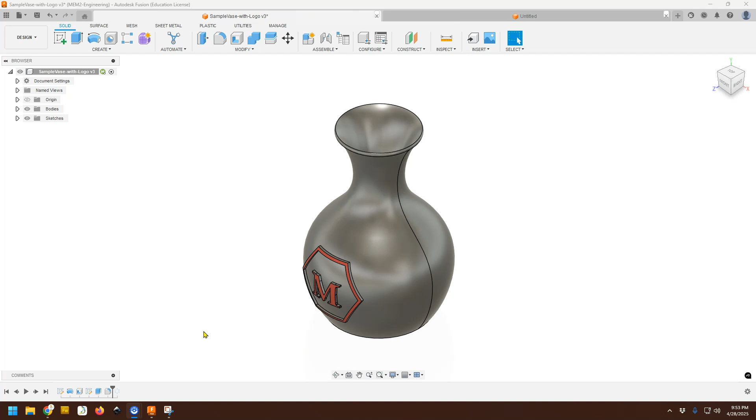In this video, we're going to walk you through how to make a simple vase like this one. If you look at this vase, it is curved on the sides, it has a logo on the front, and it is hollowed out on the inside.

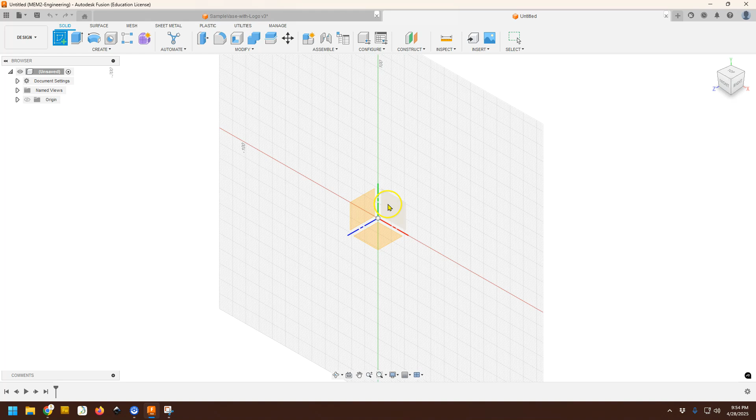So first, let's start a new object. I'm going to start with a sketch, and I'm going to pick one of these vertical planes to sketch on. Now I'm going to start by just drawing a couple lines that represent the overall size of my vase.

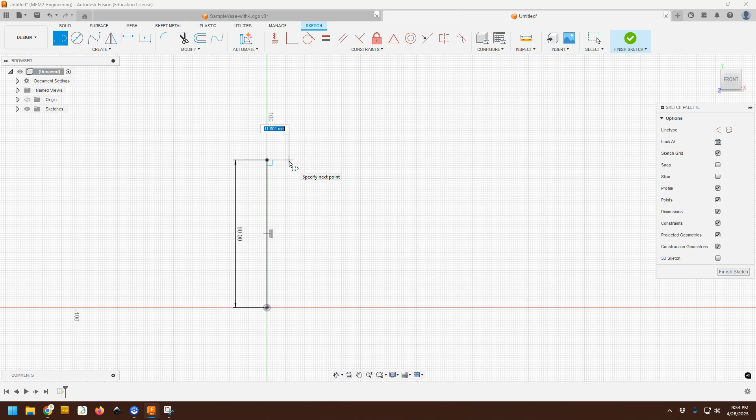Now I want my vase to be 80 millimeters tall. It's a little vase. I want the neck or the top of the vase to be 36 millimeters wide total, so I want to type in half of that. And then I want the bottom to be a little bit wider, and that's going to be at 20 millimeters.

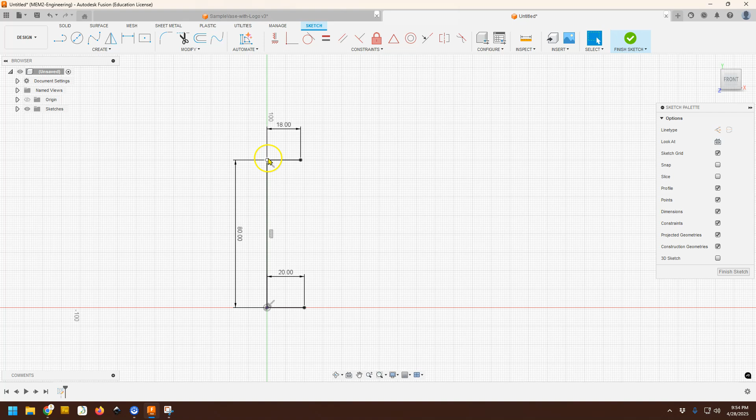If you notice, as I'm drawing these, I'm allowing Fusion to add constraints, to add these horizontal constraints and this vertical constraint as I draw it and let it snap to vertical. Now these three lines are sketched as a guide to give me the overall size of my vase.

Now I'm going to sketch the curve of it, and this I'm going to do freehand. So instead of a line tool, we're going to go up here and use the fit point spline tool. If it doesn't show up on your toolbar, you can go to create, then spline, and it should be the first one.

And now I'm going to click. I'm going to start from the top and go down to the bottom and just kind of draw a few dots that define the curve of the vase that I want. So I'm going to start by clicking on the top corner here.

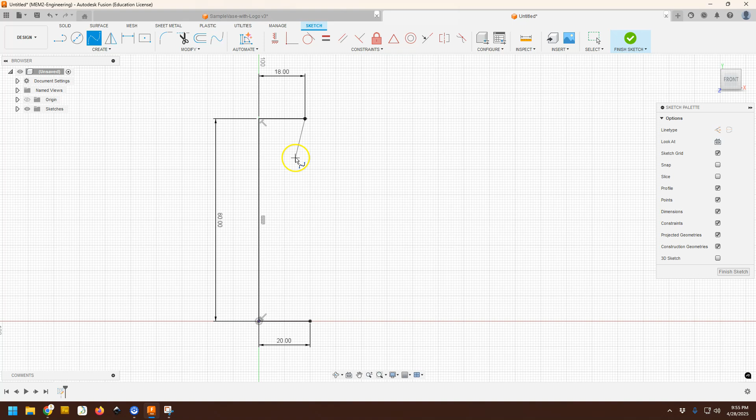I want to come in a little bit, then come back out a little bit, then come back out farther, and then curve down. And this last one, I'm going to let snap to the bottom line here. And then I'm going to finish.

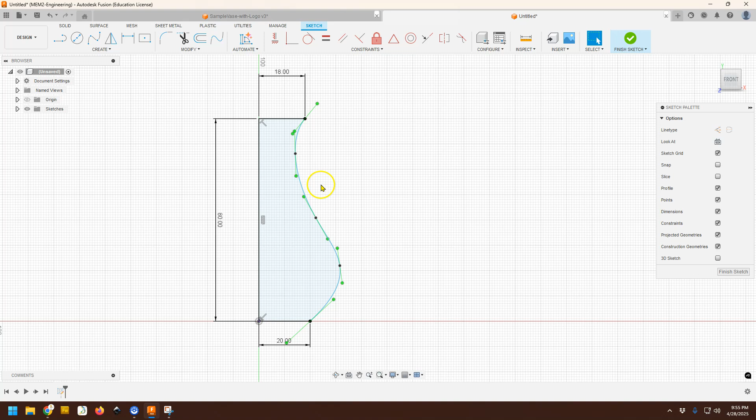And now I have an enclosed shape, and again, I just kind of freehanded that. Now, if you want to change any of these, you can hit escape or hit the select button to go back to select. And if you notice, when this spline is selected, if you zoom in a little bit, each dot where I click, there is a kind of pivot point there, and I can move this around.

So I can kind of redefine it. If I want to go a little bit thinner up on top, I can move it in. If I want to be a little fatter up on top, I can move it out.

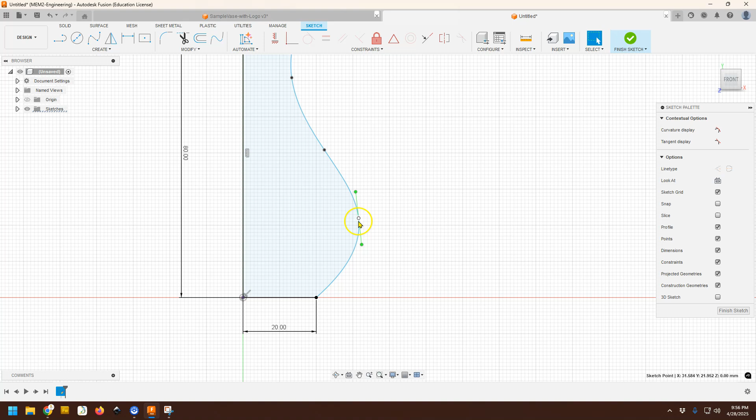And also, when I select one of these dots, I can actually control, there are these handles that show up, these green handles, and this lets me control how curvy that point is. So you can kind of go back and by hand redefine the shape of your vase. And again, at this point, it's good to just play around with this to get a feel for how to draw splines and what these handles do and what moving the points does. For our purposes here, this is a fine shape for me.

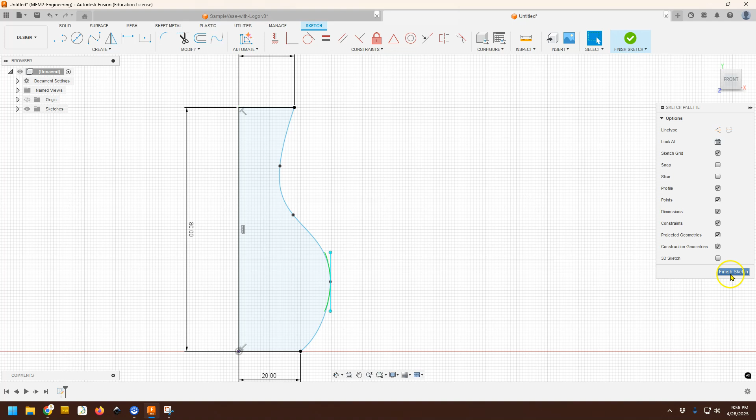So I'm going to finish my sketch and go back to our home view. Now, this time, instead of extruding things in one dimension or extruding things linearly, we're going to revolve something.

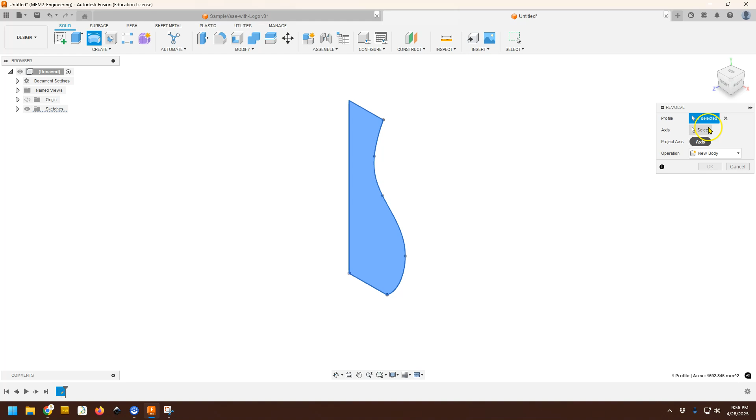So I'm going to go up here and click the revolve tool. It automatically selected my vase. If it didn't select it, I could just select that sketch. And now where it says axis over here, this is the axis you want to revolve around. I'm going to choose this edge here of my vase, and it spins it around.

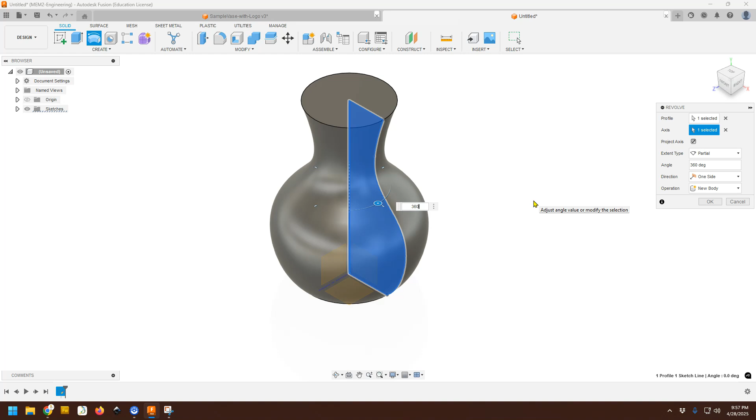And right now it says 360 degrees, but you could do a partial revolve, like if you want to make a Pac-Man vase, which wouldn't be a very good vase. But we want to fully go around, so we're going to make sure that is 360 degrees, and we're going to hit OK. And there is the outline of our vase.

Now that doesn't make a very good vase if it's just an outline. We want our vase to be hollowed out on the inside. So we could draw another shape and revolve it around and subtract it, but there's another tool that works really well for this.

We're going to go up to the Modify menu, and we're going to select shell. If it doesn't show up, go to modify and select shell. What this does is let you select a face and then tell it how thick you want your thing to be, and it'll actually hollow out the thing for you.

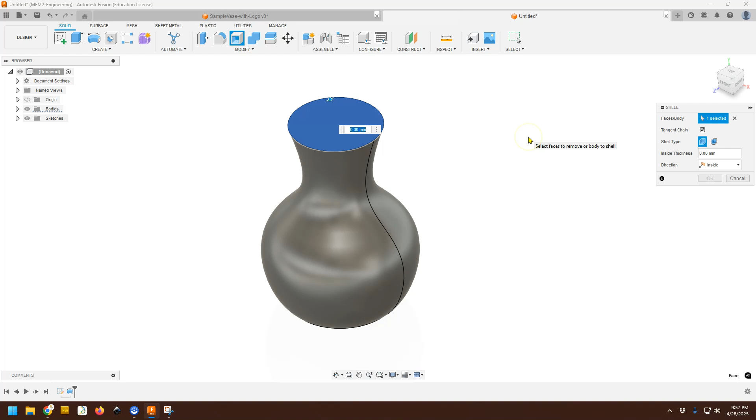So we want to hollow out the inside of this, so I'm going to click the top face. It's going to ask me how big do I want this to be. I'm going to type in 2 millimeters and hit enter. And just like that, I have a hollowed out vase.

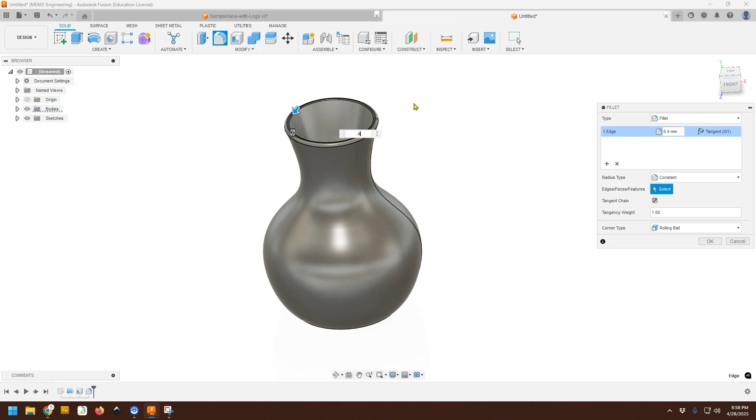Now we want to make this a little bit cleaner looking. I'm going to add a little bit of a round to the top. I'm going to select our fillet tool, click on there, just do a small round to the top. Maybe one on the inside as well. Probably can't do one, it's 0.4, see what that does. Sure, why not? Just to break the edges a little bit.

And now, simple like that, we have a vase that we could 3D print. And we were done. But we want to go a little bit farther because in my sample, I had a little logo on the front. So I'm going to show you one more little trick to put logos.

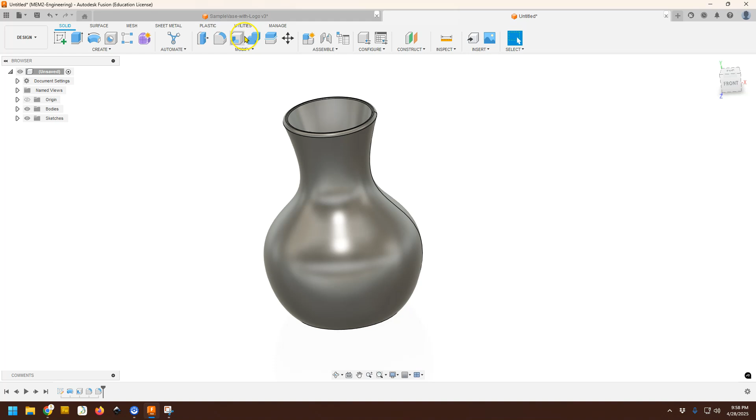And if you look at the logo that we want to put on here, if you notice, the logo is curved to the shape of our vase. So we can't just draw a logo on a flat plane and extrude it. We have to do something a little bit different.

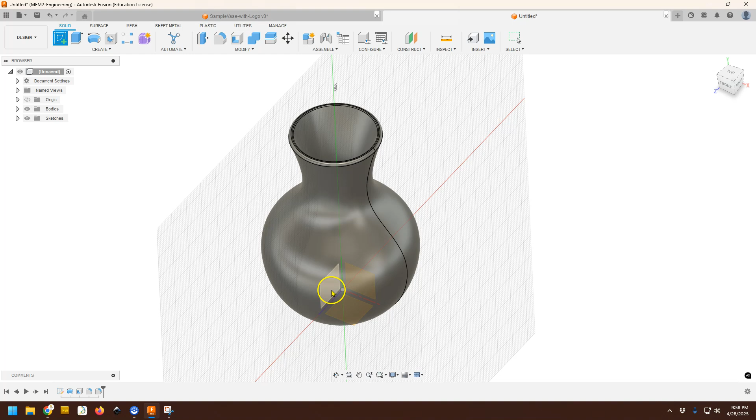I am first going to draw something on a flat plane though. So I'm going to draw a new sketch. I'm going to pick this interior plane, one of the ones inside of my vase. Doesn't matter which one. And I'm going to freehand this a little bit. You would want to do a little better alignment maybe.

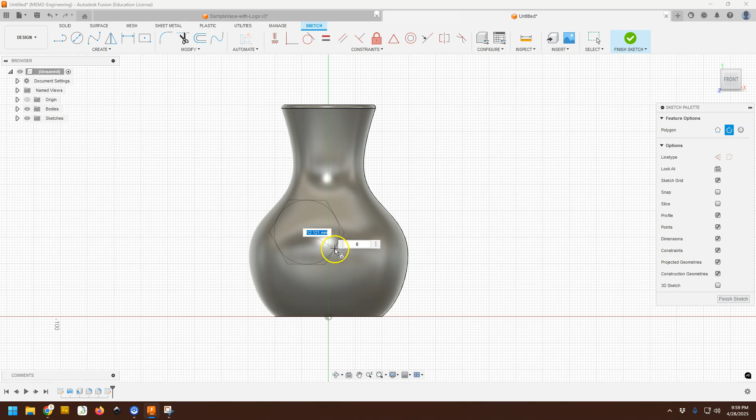I'm going to go to create, let's create a polygon. And I'm going to just put it there. Let's use some constraints. I'm going to make the center of this coincident to, oops, not to that point. Let's undo that. Let's turn our origins back on.

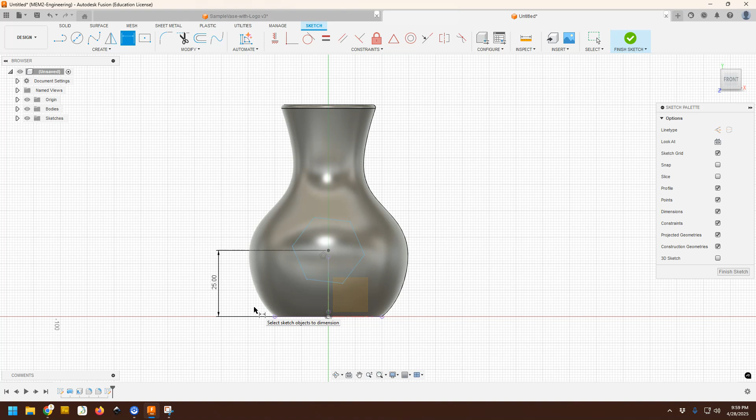Let's make the center of this coincident to that line. Let's give it the dimension, the center from the bottom. Let's have that go up, I don't know, let's say 25. And then also I want right now my kind of polygon here is at a little bit of an angle. So I'm going to just use a horizontal constraint and say I want the top of this to be horizontal, and that'll straighten it out.

Now I'm going to throw in a little piece of text. Actually, first I'm going to offset my polygon. Make sure change selection is selected. I'm going to offset it 1 millimeter bigger. And then I'm going to go create some text. And I'm going to use these pieces here just to make sure it fits inside.

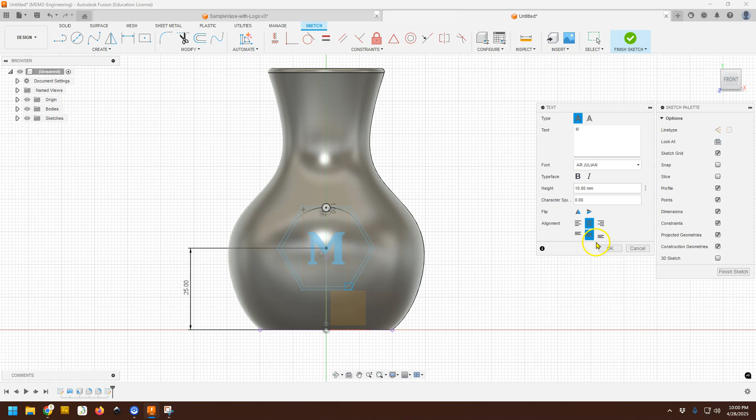Again, you could also freehand the text. I'm going to draw my box using that. Let's just put a letter M inside there. Let's center it up and down and sideways. Arial's kind of boring. For some reason my computer doesn't want me to select fonts. Let's use that. That looks fine. Sure, for this case that looks fine. Finish that, and we'll finish our sketch.

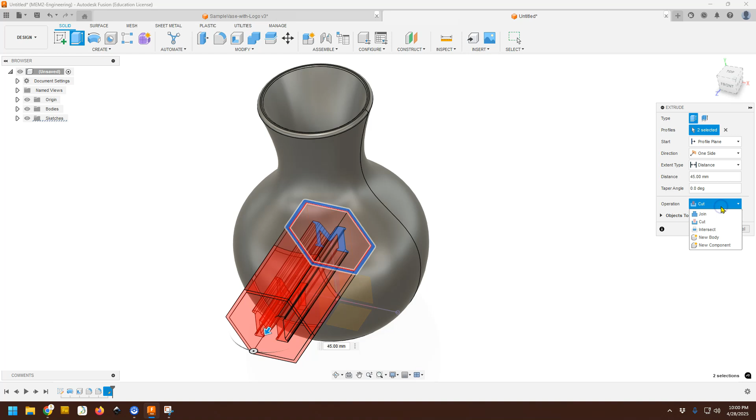So now we could go and extrude this. So I could say I want to extrude. I could choose, for example, that outline and that sketch, and I could extrude it out. Now that would cut a hole in the vase, which again wouldn't make it a very good vase. If I add material, if I put join, that's going to add that, but it's also going to add it to the inside. That's not what I want to do.

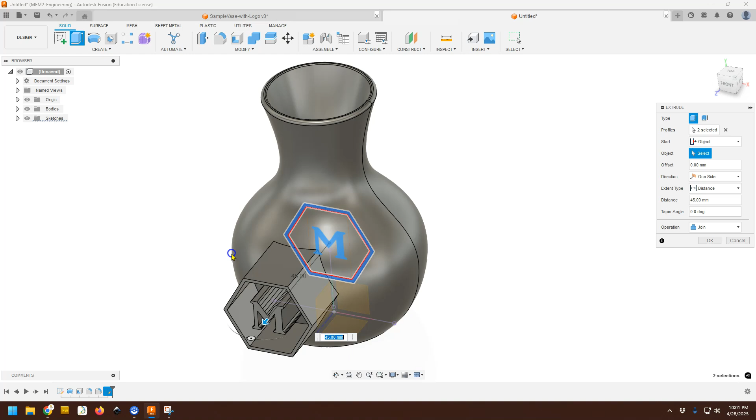So if you notice over here under the extrude menu, where it says start, we usually put profile plane, but we can change that. So we can say I want to start on an object. So I'm going to say I want to start, and I'm going to select, oops. Oh, I'm in the middle of, let's cancel that. Let's do that. Got stuck because I was in the middle of doing that.

So let's make an extrude. I'm going to select on the object, and I'm going to select this object. And now the profiles, I'm going to still select those profiles. Now I'm long holding down here so I can grab the text.

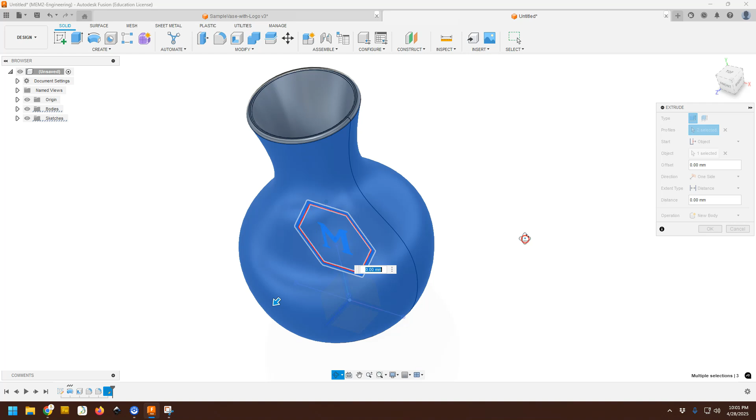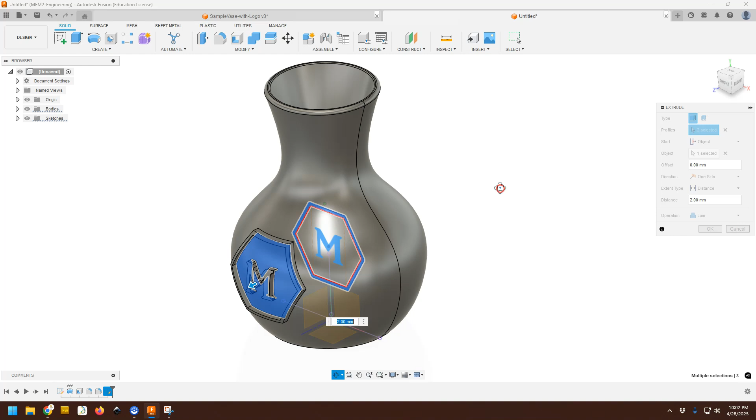And now when I pull this out, if you notice, it's pulling out from the outside of this. Oops. If I'm just going to try to just type in, there you go. Let's do about 2 millimeters so we can see it. But if I look on the inside, there is nothing added on the inside. It only started adding material when it started on the outside of the curved vase. Even the curved parts, there's nothing there. Let's actually make this 1 millimeter.

Enter. And now I have my little curved logo on front of my vase. And again, it didn't go through the vase. It's not on the inside. It's just right there on the front. And our vase is done.